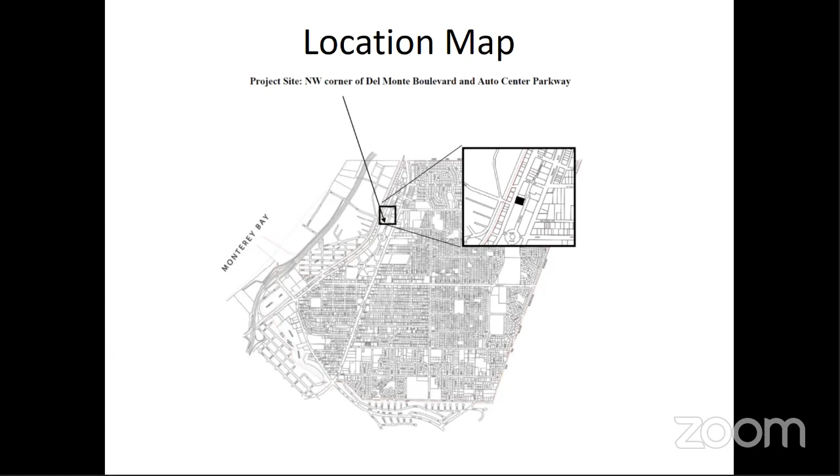Do we click again, or did it not? Okay, darn, I'm sorry. No, that's it. Sorry, buddy. Yeah, I must have not been able to carry it over.

So the site plan will, thank you. You can see the mall, which now has become Auto Center Parkway. That area, as it comes from the Geary Plaza area on Fremont and that Geary Plaza entrance, you can come northward toward the site and it loops back and connects into Del Monte. But there you see the entrance into the site.

Well, that would be the primary entrance into the facility. It has two-way access. It'll allow for cars to travel northward, where they then would turn left at the top and loop in a counterclockwise into the pumps and canopy.

There's 12 dispensers with 24 pumps.

We'll note that we have a landscape plan to show, but we'll note that you'll see primary landscaped areas will be at that bottom southeast corner, and at the top there will be where the underground tanks are. There will be other planting to screen that area. There is a black rectangle on the southeast. That is a controller building, which would house the controllers for the underground pumps, and there would be an employee bathroom.

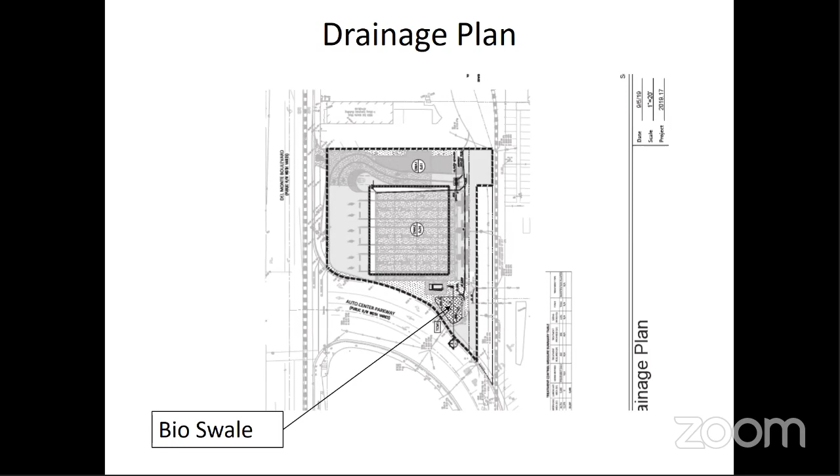We'll note that there are 3 trees being added on the Del Monte frontage, and we do have a photo of all the plant materials that I'll quickly go over before the applicant proceeds with their presentation. There will also be 3 trees planted at that southeast frontage, right near where the controller building is, so we'll have the ability to screen that further from public view as cars travel on the Auto Center Parkway and on Del Monte.

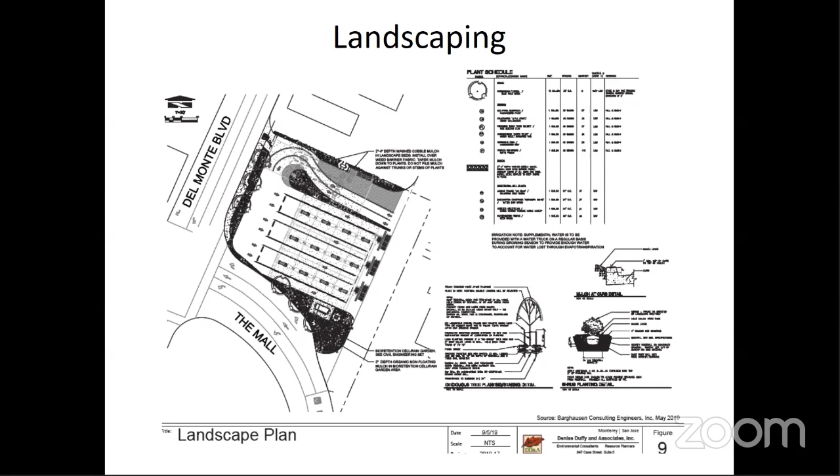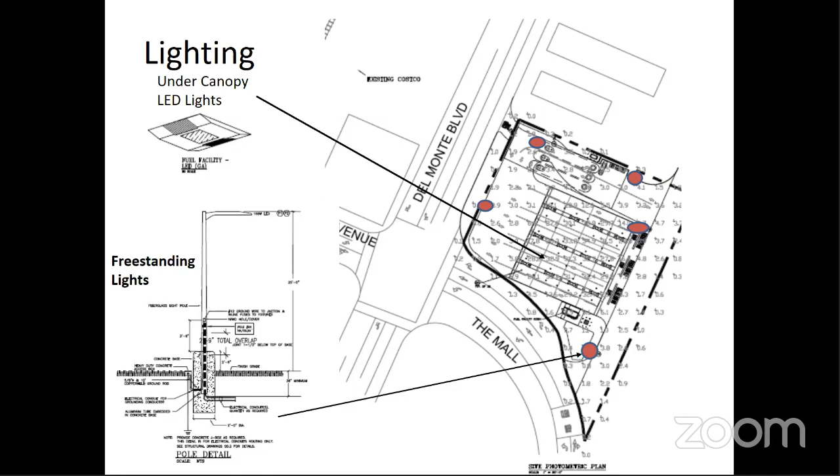Okay, thank you. So overall, what we find is that the canopy does represent the type of canopy that would service that large canopy area needed to facilitate coverage for the pumps.

We find that the materials are of high quality, and we have noted in the staff report that the project site itself would be compliant with the related automotive dealership uses to the south and east, and there are also auto repair uses directly to the north.

Across the way on Del Monte, we have an auto repair shop, an auto body shop, and a Porsche dealership. So staff finds that the overall layout of the site will be compatible with those uses and how it coordinates with the auto center itself.

We have included findings that the project, as conditioned for the landscaping, will be compatible with a low drought tolerant plantscape.

City staff would note that there is condition 7 relating to water use, and there is a condition in the use permit that governs water use in this project. Staff finds that condition would not be necessary or applicable for the BAR this evening, and we recommend condition 7 be stricken, as it is water related and doesn't impact your design considerations for the canopy, landscaping, and lighting.

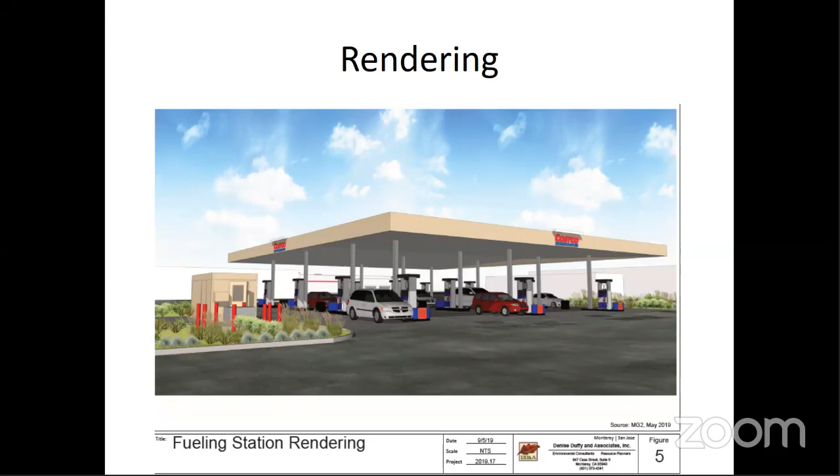Yes, there's access on Del Monte. You can make the right turn going northbound, and there's a left turn pocket at Del Monte to turn into Auto Center Parkway.

So you would enter, oh, I see the curb cuts, I think. Are there 3 curb cuts on the mall side?

Well, they have an entrance. You can see the entrance as you turn into the site, and then where that pork chop is, that would be the exit egress for cars to go either left or right back to Del Monte, or you can go left and travel back to Geary Plaza and Fremont Boulevard.

Okay, I'm sorry, it's a little hard being virtual. I'm just trying to really get my bearings.

The property is oriented so the north side is at the top, toward Del Monte Boulevard, which runs north-south. The north side would be at the very top, traveling toward LaSalle Avenue, which is toward our restaurant — I'm sorry, I can't think of the name right now. Gusto's, that would travel to the north.

Traveling to the bottom would take you back to the Ford dealership and the other dealerships within the auto center. So you can turn in from Del Monte, turn into the auto center, and then leave from the mall area?

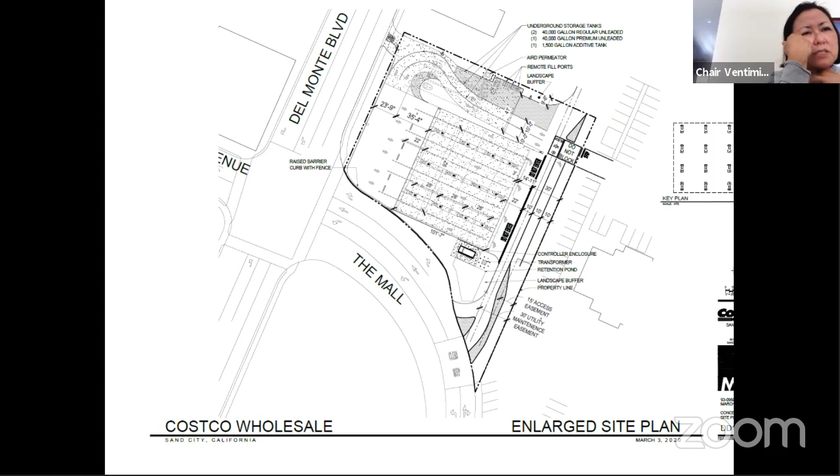Good evening. This is Sean Anderson from Barghausen Consulting Engineers, one of the many Sean Andersons on here tonight because we used my login. But we do have the design team available.

It doesn't sound like there's anything necessarily standing out, but I think Rick covered the project well from a design standpoint. As mentioned, the site is restricted in terms of the landscape due to the water moratorium out there on the peninsula, so we've taken a very efficient approach to make sure the plants selected are robust enough to withstand the water restrictions. But we do have a plan to provide water trucked in off-site to help them get established initially. That's all detailed in our landscape approach.

As far as the canopy and the control enclosure are concerned, it's a design approach consistent with the warehouse, with the purpose being that initially members will just want that recognizability to learn where the facility is, and once it becomes a learned location for the members, they know where to go after that. So that's the approach—we really wanted it to be consistent with the warehouse.

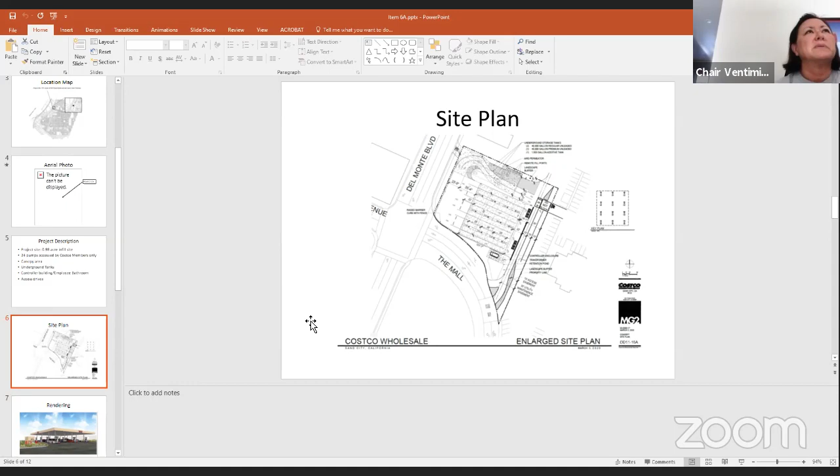And then you have another 24 to 27-ish in the queue. So the queue storage area, within the two queue storage lanes with that sweeping curve, can accommodate around 27 vehicles. And on occasions when members are approaching, there's room for as many as 5 more in that left turn within the alleyway accessing it, all contained within Costco's property.

The intention is that this is an amount of storage commensurate with storage provided on other similar sized sites. So evaluating the queue storage area and expected maximum queues, this area is expected to meet the maximum queue expected at this site, based on queue data from numerous other similar Costco fuel station sites.

I just need to input that this was fully analyzed. So from the standpoint of your findings this evening, this is an approved layout, and it's only the design aspect of the colors, landscaping, canopy, and so forth that you'd be reviewing this evening. But we're glad to answer your questions, though.

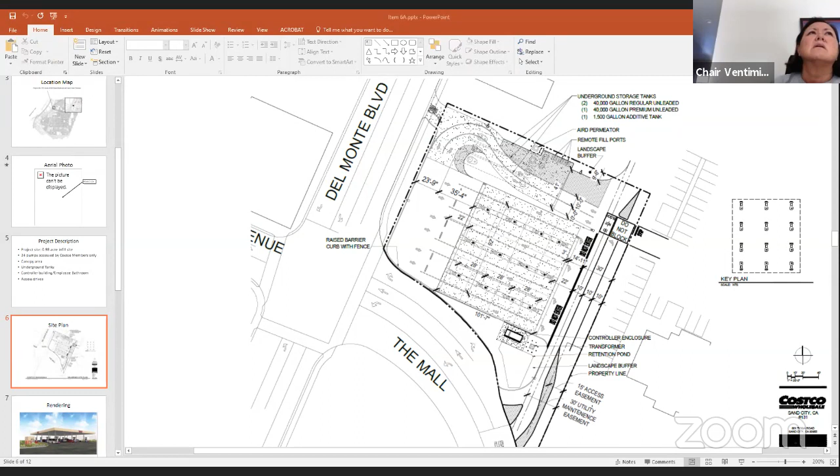Just when you're on the mall roadway and you're going to take a left turn to turn into this driveway, is there a left turn lane? Will there be a left turn lane to make that left turn? Is it just one lane to go left? Yes, currently it's just one lane.

I do have a question. Are the canopies sloped or are they straight? Do they have a small slope to it? As far as what will be visible, it's a flat roof canopy, with the metal wrap fascia around the edge of it.

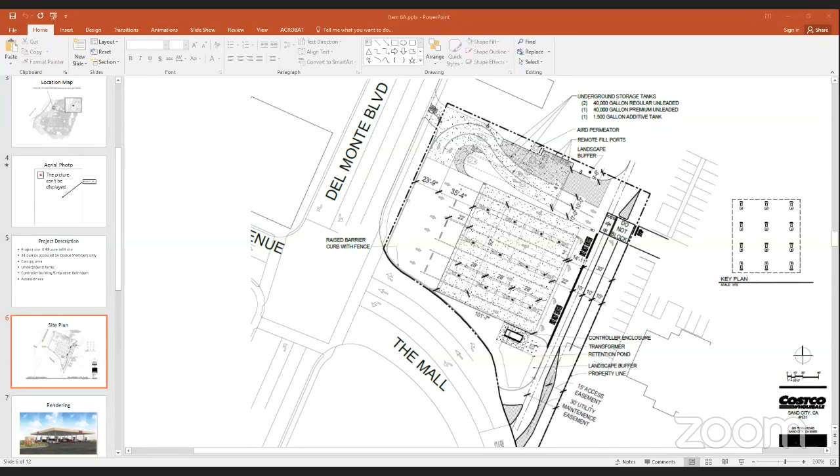Okay. I keep trying to click on it. Assistant City Manager, could you go to number 7 just to see the visual again? Thank you.

So I'll go ahead and ask the question if there'll be solar panels on the canopy too, which was also asked on the public, but I don't see that as part of the design. Is that correct? That is correct. There will be no solar installation at this site. It's a question that gets asked from time to time, and the reason being that for a canopy of this size, there's not a huge gain or benefit that the site would get from installing solar panels.

And then also, as far as the canopy design is concerned, the initial approach we take isn't really designed to incorporate that from a design perspective. So for various reasons, solar won't work on this canopy design. It will not work, or you chose not to put it on the design? It does not work. The benefit's very minimal, and the requirements in terms of structure and design just start to exceed what the intent of the canopy is for the facility.

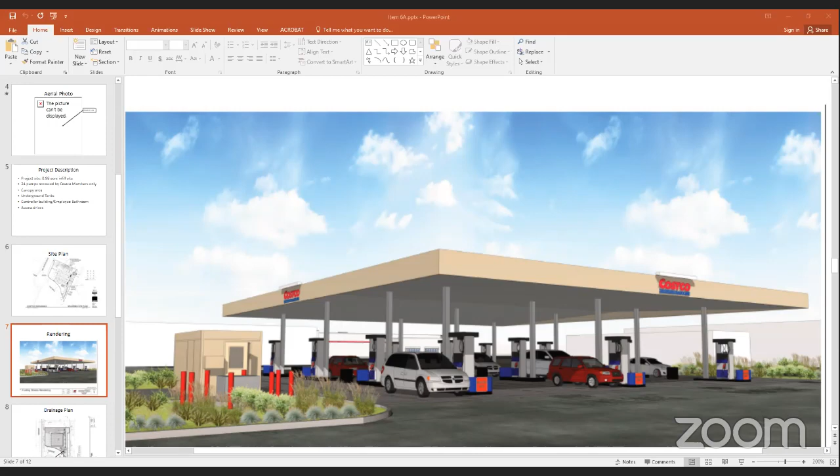All right, it's been moved and seconded to approve the project with condition number 7 to be struck. All in favor, say aye. Aye. Aye. All opposed? None. Motion carried. Thank you.

Okay, so help me here, Leslie. This project can be appealed to the City Council within 7 calendar days. And to contact the city, contact you, Leslie? Please, they can contact me either by phone at 831-899-6707 or by email at cityclerk@ci.seaside.ca.us appeal, and I can walk them through the process. And it has to be done within 7 calendar days. Yes. All right, thank you.